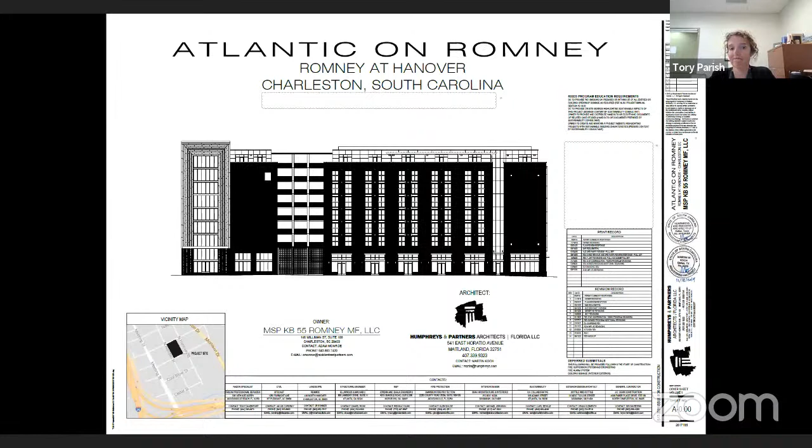All right, we have with this one, Mr. Craig Clements. I apologize, I forgot to—he is already active, I think. Yes. Okay, Mr. Clements, you have the floor when you're ready.

All right, thank you. I'll see if I can option video. Perhaps not. Okay, well, I will just say I appreciate the board members all coming out yesterday and taking a look at the sample panel. Sort of feel like my presentation was there, not having the sample panel here with us tonight. We had some good discussion around it on site, and I'm not sure I have anything to add to that.

Certainly can answer any further questions board members may have. Otherwise, would yield the balance of my time. Okay, thank you, Mr. Clements. Live public comment on this agenda item, Ms. Parrish? There is none. Okay, city staff comments and recommendations.

I do have a few observations tonight that aren't in the slides, but I'll be reading them. It is noted that this is a very large mock-up, and while representing 4 large, distinctively separate towers over a podium base, the mock-up likely could have been downsized. Both the architect and contractor have explained that the mock-up has been used extensively to work out constructability issues. This goes back to the inordinate size and cost of mock-ups, to which staff and board are increasingly sensitive.

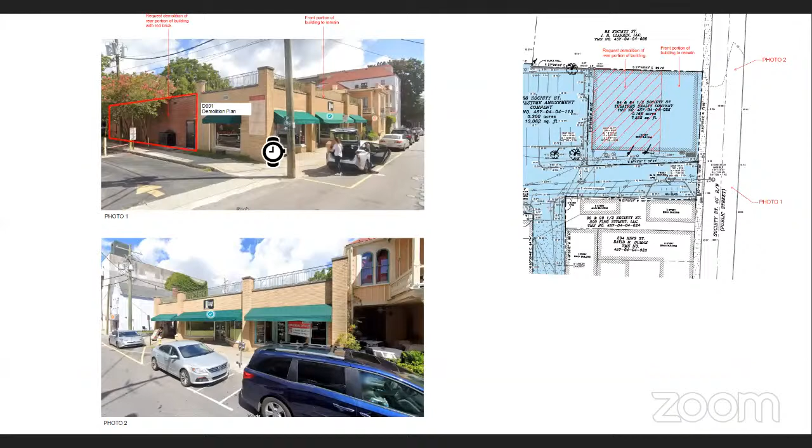This is pretty straightforward. This is, as we said, requesting demolition for 84 through 88 Society Street, the rear portion, as indicated on the slide that was just up. During the history of this building, there's not much since 1955. You can't really determine anything. We shared this information with Ms. Parrish late this afternoon, but I believe they already had a copy of this record from the previous applicant. So the yellow brick we're proposing to keep, the reddish brick we would propose to tear down. There was mention that this was a Constantine building, but we've never found any confirmation of that, so we don't know for sure if it was or was not.

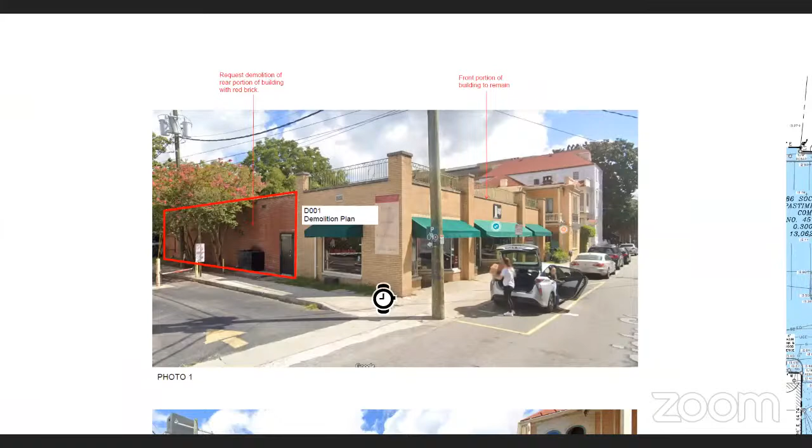Yeah, that's pretty much all we have for this. I'll take any questions. Thank you, Mr. Giuliani, that's pretty straightforward. Thank you for the research and for continuing to supplement the information that you got on the board.

Ms. Parrish, do we have any public comment on this agenda item? We do not. I didn't think so from what I've seen earlier. Very good. City staff comments or recommendations?

The rear portion of the building proposed for demolition is unremarkable with no real character-defining features. Second, the plane at which demolition is proposed is demarcated by a marked change in brick and is a logical point for removal to the rear. Third, there is a brick projection to an adjacent property wall to the east which will bear further study to ascertain what occurs behind it along the length of the wall. Regardless, it is assumed that whatever new construction is to follow can be handled for any adjusted existing conditions. And fourth, any materials which can be salvaged and reused should be. We are recommending approval of partial demolition as noted with board and staff comments.

Okay, Mr. Giuliani, if you want to have any rebuttal or clarification, now's the time to do so. You certainly don't have to exercise it. No, we're good, thank you.

Okay, very good, so we'll proceed to board discussion and a vote on this agenda item. Mr. Chairman, I just have one comment on item number 3 that Tori was talking about, that there is that one brick that is the same brick we see on the front and side of the building that reaches out to the east, as Tori describes. The Sanborn map nor the survey that I looked at shows that, so it's just, it is an important detail. It certainly can be handled. It's an interesting detail. Okay, thank you, Mr. Meadows. Further board comment?

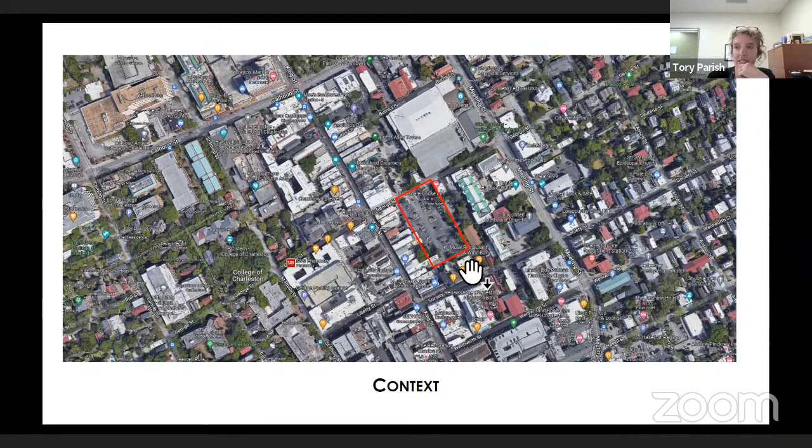All right, I am trying to get everyone upgraded here to speak. We have Mr. Mark Batoni, who is in the meeting, and I'm not finding Daniel's name. I can see Daniel. Hey, I'm so sorry, my audio cut out as soon as I was added as a panelist, so I just took out my headphones. Can you hear me now?

We can. Which of the two of you would like to lead off on this item? I'll go ahead and lead off. Thank you all very much. My name is Daniel Porbaba. I'm the project applicant and owner.

I'd like to thank you all so much for your time and effort reviewing the proposed project and sharing your feedback with us. I'd like to first start by saying that we feel really lucky to have the opportunity to work on this project. Charleston is one of the most special places in the world, and to be working on adding to the building fabric of Charleston in such an exceptional historic location that remains underutilized after all this time has been one of the highlights of my professional life. We feel a massive sense of responsibility and privilege to be involved, and have been so grateful for the support and genuinely thoughtful feedback and advice from so many stakeholders and community members. So I just wanted to thank all of you a lot before we kind of kick this off.

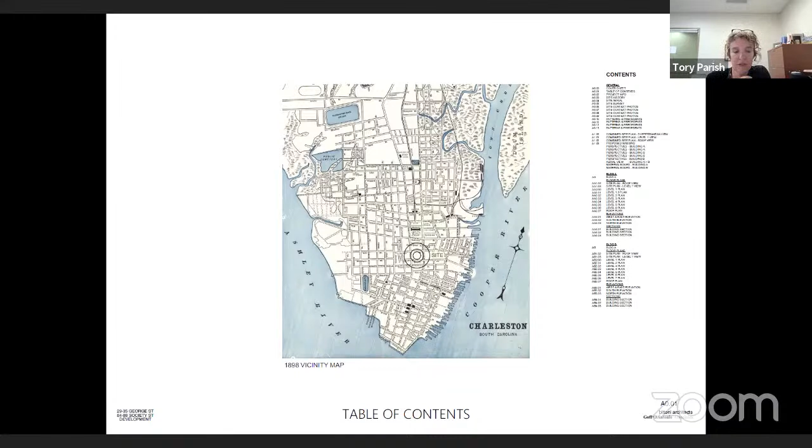So let's see, my understanding is that you're going to be, Tori, controlling the slides. I just simply say next as we go. Is that how it works? Sure, Lawrence Courtney is, but if you'll just say next, he'll advance. Okay, perfect, that's great.

Again, my name is Mark Balcony. I'm the principal architect here at Balcony Architects. We're based out of Los Angeles, California. It's a pleasure to be here in Charleston, and I look forward to meeting you guys in person at some future opportunity. It's been a real pleasure to look at Charleston and understand the unique situation we have with such a unique historical fabric.

So what we're doing today is presenting two buildings, as Daniel mentioned: 29 and 35 George Street, and 84 and 88 Society. Our George Street project is proposing a 6-story, 96-unit apartment building with approximately 3,500 square feet of retail and restaurant on the ground level, and 3,000 square feet of restaurant and covered outdoor dining on the second floor. The Society Street project is designed as a 7-story building with a 50-key hotel and 22 residential condominiums. Daniel also mentioned that we're going above our baseline of about 180 parking spots by adding 72 more.

One of the fun parts about working within Charleston is having historical context. I have a 400-year-old city versus Los Angeles, which is maybe about 150 years in terms of its contemporary nature. We took a closer look, took inventory of what was immediately adjacent. In particular, we have both our project that we talked about in the demolition permit earlier, and also focused on 90 Society, which we'll reference later when I show our site strategy. You can see some of the earlier versions of what was going on along the site.

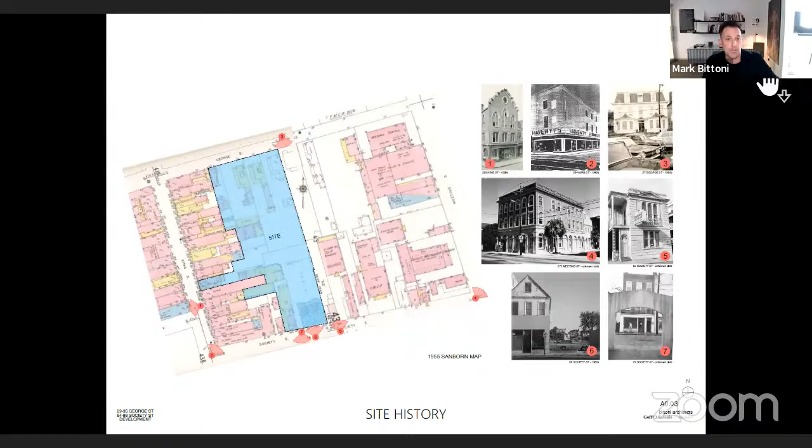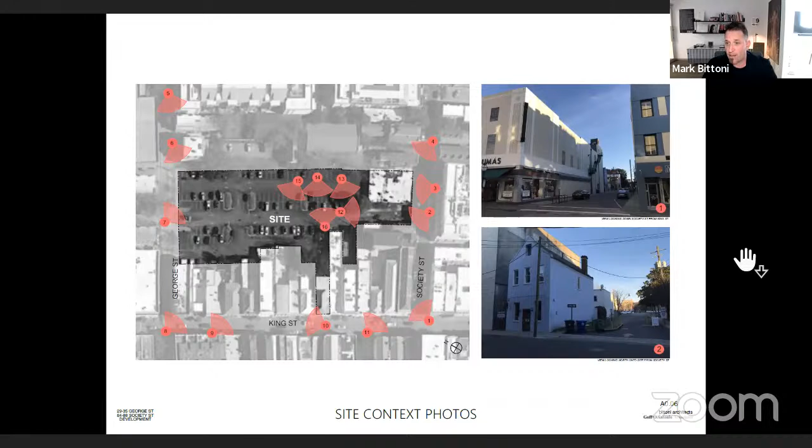This gives you an idea of the survey and how we attach that. These are some contextual images showing the site, how you approach from both east and west, and how it comes off of King Street. These have all been keyed in — you can see our existing historical building here, the theater company.

And these are contextual images along King Street, which you guys are all familiar with. Next, please.

So these are contextual shots showing the site going from the inside into the out, kind of like what we had looked at earlier with Tori in her presentation. Next slide.

This slide was meant to understand how we might be able to take a more traditional pattern language from the architectural vernacular of Charleston and somehow recontextualize it in a more contemporary manner. So some of those elements, you can imagine a loggia or windows that could be a certain scale, but those windows take on a different, more contemporary character.

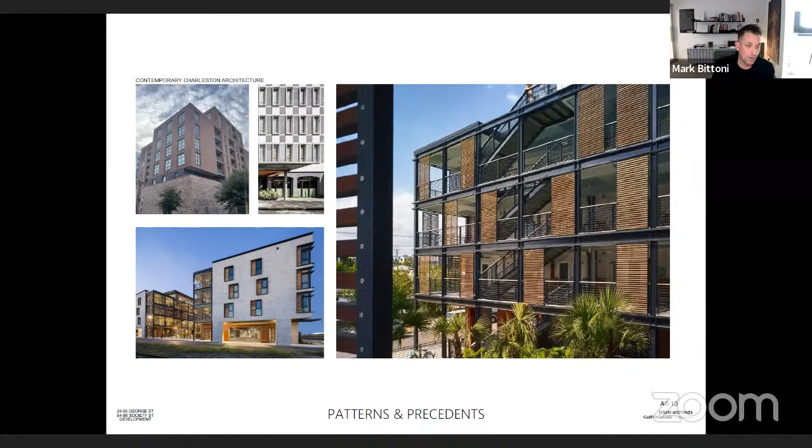Next slide, please. So let's go to the next slide, which is the combined site plan, and this is what Daniel was alluding to.

The idea is that our vehicular entrance would come off of, for Society and George, both projects, both buildings, off of George Street, and then you would circumvent, go along the back of the King Street vendors here, and have this access road. It would all be one way. That access would essentially be a drop-off for the hotel, pulling vehicular traffic off of Society and pushing a lot of it onto George Street.

That would then allow you to loop along the building, entering into the George side building. And then if we go back to the previous slide, Lawrence, please. Thanks. You can see we're proposing a full subterranean parking structure that would straddle both parcels, or both streets in this case. Let's go back to the site plan.

Great. Also, the other piece Daniel mentioned earlier is the park. The idea is that we would be using the existing historical building along Society, framing out the smaller building we'll show in some later renderings, 90s Society, which we thought was a really special building, framing that and creating this kind of urban plaza. The lower level aligns with the historical building already there, and we have this esplanade that connects you from the drop-off all the way to Society. The idea is to really create a space that's animated and lively.

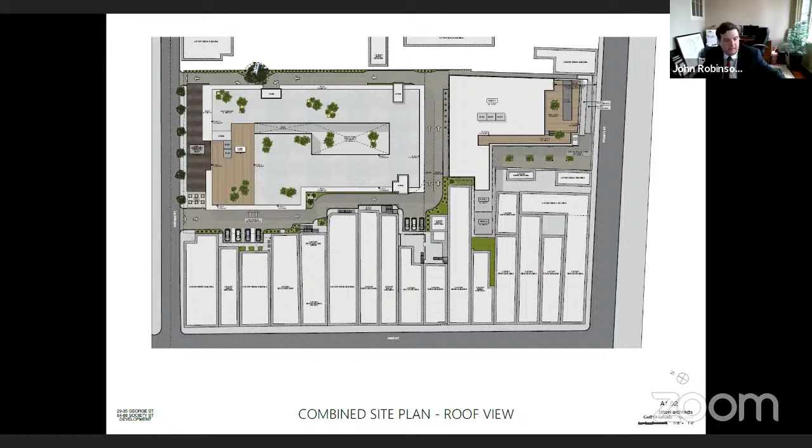This was sort of a visual impact study. One of the things we wanted to be cognizant of was our relationship to King Street and its perceptibility from King Street. So these are showing how our project's massing from King is negligible in terms of its view from King.

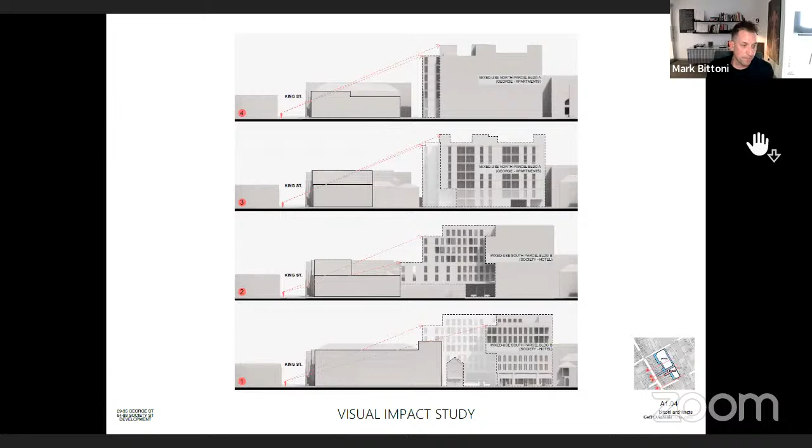Next slide, please. So this is building A. What we're looking at here is this loggia piece, a 2-story piece with our retail component at the bottom. Then we have the restaurant and terrace bar, which would be on the 2nd story. And then we have 4 levels of housing above that.

The mass of the project is basically broken up into 3 pieces: the 2 main masses, and then the middle connective piece, which is an exterior condition, a breezeway to allow airflow into the courtyard.

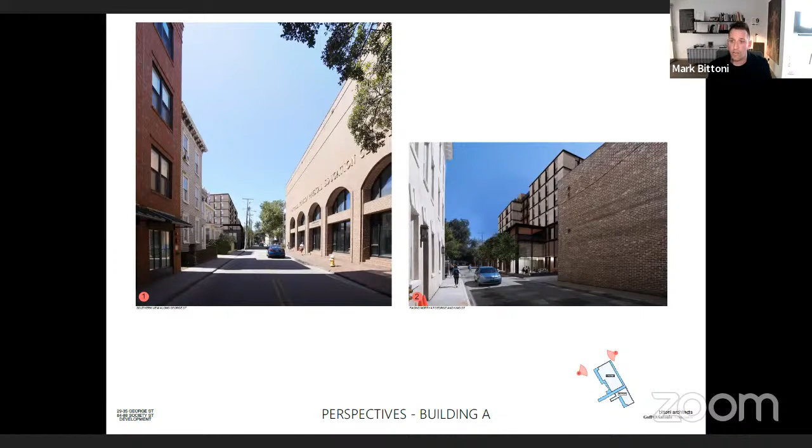This perspective gives you both views, east and west from the George side, showing how our project relates to the existing context.

Next slide, please. And then this is what we're looking at on Society. As you can see, we have our existing building on the 1st floor, and then our hotel identified on floors 2 and 3. Floors 4, 5, 6, and 7 are the piece that creates the cantilever.

One of the reasons why we adopted this cantilever as an architectural element was to allow as much openness to the courtyard as possible, so we wanted this to become its own encapsulated space.

I realize from this viewpoint, clearly this is from the other side, from the other hotel. I don't think you'd actually be able to see that.

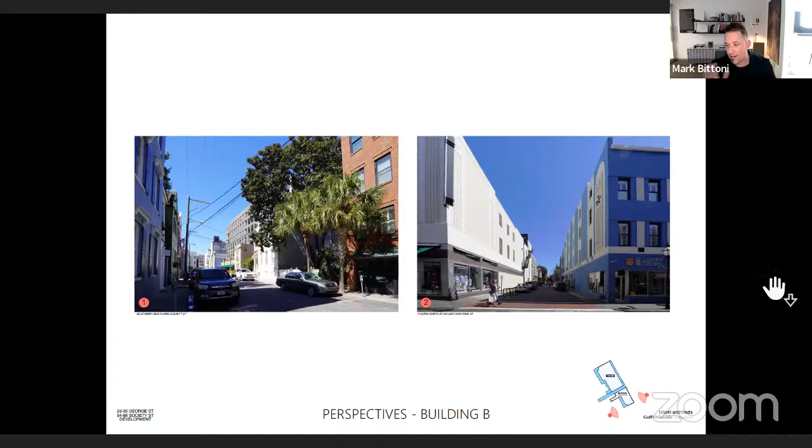If we look at the next slide, you can start to see how this fits in towards the context. And if we go one more, you can see from King Street the project actually starts to hide itself, particularly around the Dumas building, which I believe is right around 55 feet high. So it really masks that along the Society piece. Let's go to the next.

This is an aerial view, which I thought was interesting given the scale of the project and plunking this into the site and looking at the greater context. You start to see that some of the massing fits in with other elements, particularly on the other side of King Street, as well as some things on our side. I thought this was quite telling, where from an aerial perspective this starts to fit in. Next slide, please.

And so we have a material board for building A, the idea that we would be using high-end materials, looking at brick, metal panels, reinforced concrete in certain areas.

Next. And then that same palette, remixed in terms of color and tone, would be on Society Street as well. Part of the idea from a design standpoint was to create a more romantic ideal of the hotel component while still keeping a somewhat contemporary nature to the total design.

Next, please. Great. I don't know why this is blank. Okay, there we go. I think it's just a big file.

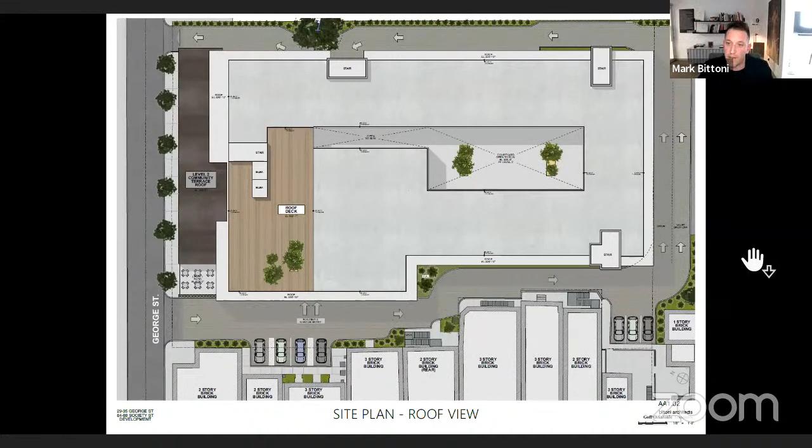And just on a more granular level, I think this is good to see how our entrance comes in off of George, and how we're maintaining all of the uses for the King Street merchants from the backside. That's going to be a nicely articulated landscaped area that people can benefit from on both sides of that easement going across.

Next, please. And then these images, which I'm sure you've already had time to review, are more of the nuts and bolts aspect showing how the building works and performs. We can keep going.

And then these are more of the straightforward architectural plans, we can kind of zip through these. Keep going there. This shows you how that building along George develops - it's a kind of standard courtyard. One of the things too is that we've eliminated what was a 7th floor on this, so now it's a 6-story building.

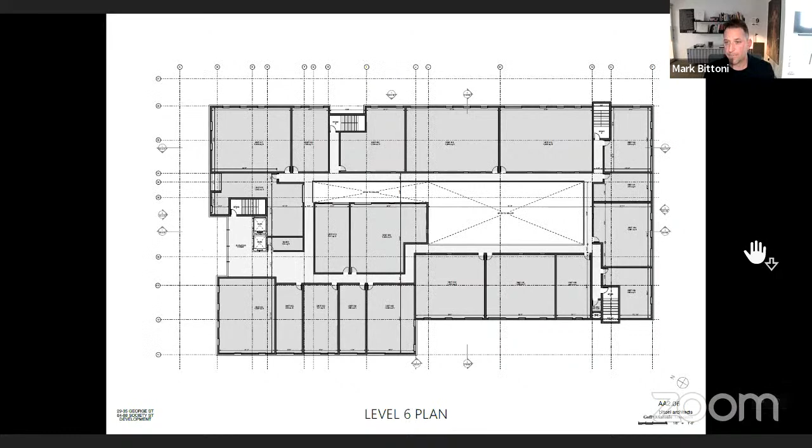Again, and roof plan. I think now we're going to go over to the Society side. Or actually, I think these are going to be the exterior elevations, if they pop up. Let's see, we can keep going through there. And I guess let's get to the Society side and kind of explain the ground level. I think it's a couple more here.

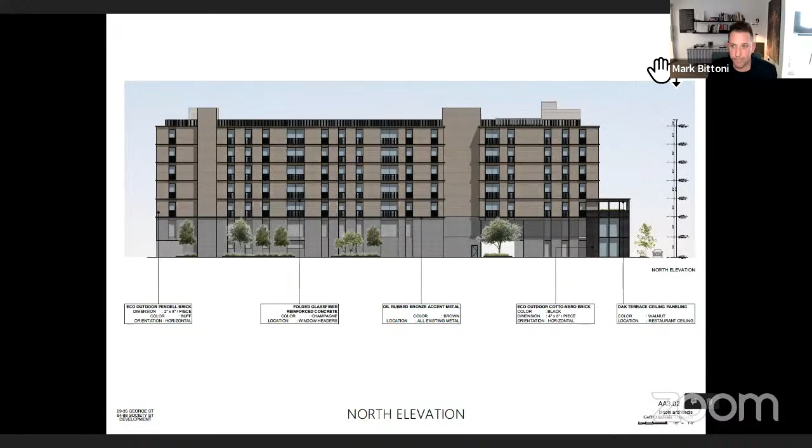These are the heavy ones. We can keep going. Here we go, all right. So can we go back one? Sorry Lawrence, there's an image there, or at least there should be. Maybe it's not, okay, we can go to the next one. Yeah, that's fine.

The rest of the images we have are more straightforward architectural things, and I think that would be the conclusion of what we have to show. Okay, thank you Mr. Bittoni. Thank you for your time.

However, we feel the contemporary design presents a stark contrast to the highly traditional historic context. The architectural expression, including proportions and details, should be softened to better relate to the scale and character of nearby buildings on King and George Streets. Particular attention should be paid to the ground floor, where pedestrians will most experience the building, which currently has a highly modern treatment. Also, we would encourage studying a better location for the elevator to mitigate visibility of the overrun pop-up at the roof.

On Society Street, our foremost concern is massing. According to the BAR principles, the authenticity of construction should be supported, and the architectural language of the building should be legible. We feel the proposal directly counters this principle of building tectonics, as the massing gets heavier as the building goes up. The approach of introducing separate, increasingly wider building masses compresses the historic building, presents a disjointed architectural expression, and creates an uncomfortable space underneath the heavy cantilever.

This leads us to discuss issues with height. Located in the heart of the historic district, directly adjacent to the 2- and 3-story buildings of Lower King Street, this is one of the most sensitive sites to seek redevelopment in recent history. We must be diligent since this will have significant lasting impacts on the character of this area. Due to the high degree of architectural issues with the project, as well as its location within a highly sensitive, small-scale historic context, we cannot support additional height and feel a denial as submitted is the best course of action to allow for significant restudy. Thank you. Thank you, Ms. Minnick.

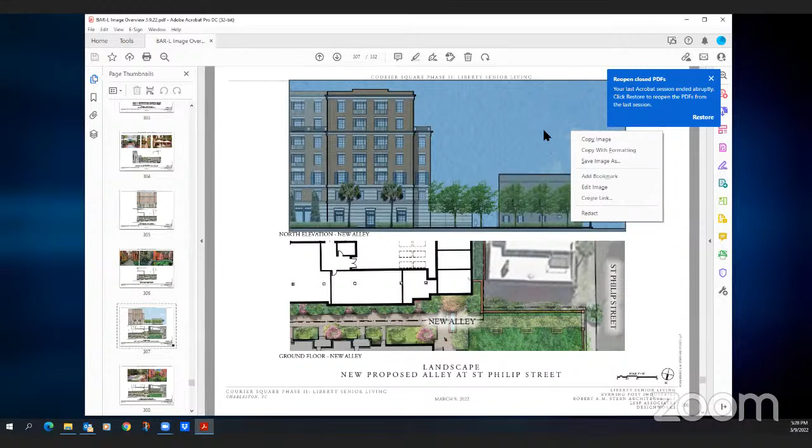Yes, thank you, Mr. Speaker. This is Justin Schwebler with Historic Charleston Foundation. I would first like to thank the applicants for meeting with us many times over the past few months throughout the development of this project. They've taken our comments and concerns into consideration throughout the process. I would also like to mention that Historic Charleston Foundation owns and maintains an easement on 306 King Street. The design team has worked very hard to satisfy the requirements and limitations of that easement.

We do, however, have some strong concerns with the project, and we've discussed these with the applicants prior to tonight's meeting. Building A on George Street, we find that the upper stories are too horizontally accentuated. The horizontal belt courses are too pronounced and make the building appear much heavier. Removal of these bands and inclusion of some delicate vertical detailing could help to lighten the building and add a more beneficial sense of verticality that follows the recommendations of the design guidelines. While we appreciate the minimalist contemporary design direction, greater attention should be paid to these levels to add more visual interest to the facade.

Building B on Society Street is also an area of concern. Again, the contemporary architectural direction, high quality material choices, and dramatic architectural moves with the cantilever are appreciated. They also have given up substantial buildable area to incorporate a park space for the public, but we feel the building is currently far too oppressive over the historic storefront. While the design team did express their concerns with us about rearranging the massing, we feel that there needs to be a more significant relief between the new construction and the historic building. We recommend pushing the mass of the new construction away from the street by at least one bay to be flush with the rear of the historic storefront. This would also help to reduce the visible impact of the 6-story massing along Society Street.

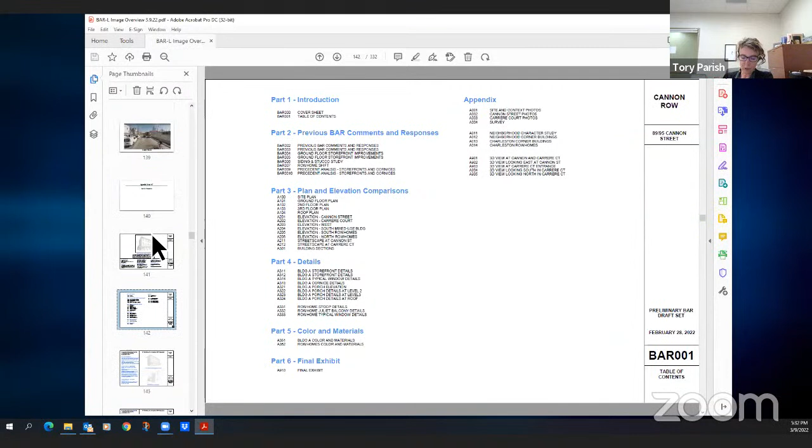Number six, the application expresses there is a request for an additional floor via finding of architectural merit and context on the Society Street building only. The George Street building appears as 7 stories, however, and there is nothing in the ordinance related to story count as only being from the front elevation.

The above ground and visible portions of building A consist of 2 stories of above-grade parking with 5 floors above it and a shallow liner building across most of the front at George Street. Staff finds that the lobby mass does not sufficiently disguise what is 2 stories of parking. However, the lobby mass in combination with elevation revisions to the parking portions could potentially disguise what is 2 floors.

Seven, applicant's proposal requires a variance at the portion against George Street for a ground floor over 20 feet tall. BAR may grant up to 25 feet for the ground floor based on architectural merit and context.

Number eight, regarding massing and scale, the cantilevering at Building B is a reverse in tectonics and is fundamentally unsympathetic and insensitive to its surroundings and to the proposed remnant element.

Number nine, the general architectural expression for the George Street building, Building A, is foreign to the block, and while it consists of an interesting interplay of horizontal and vertical elements, its architectural language would be at odds with its surroundings. The general architectural direction for the Society Street building, Building B, of multiple expressions is likewise incompatible with its context. Number ten, the lack of a perceptible human scale at the George Street first floor is disconcerting.

And number eleven, perfect timing. Context is to be considered as part of a finding for an additional floor based on architectural merit.

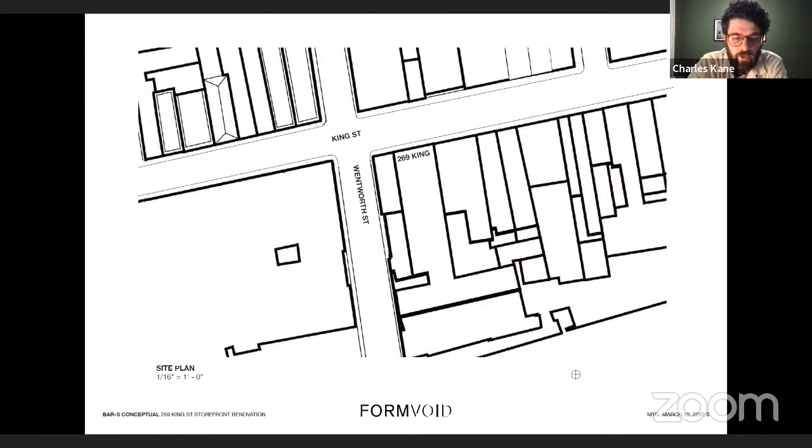Just line drawing of the context. All the buildings higgledy-piggledy. Next.

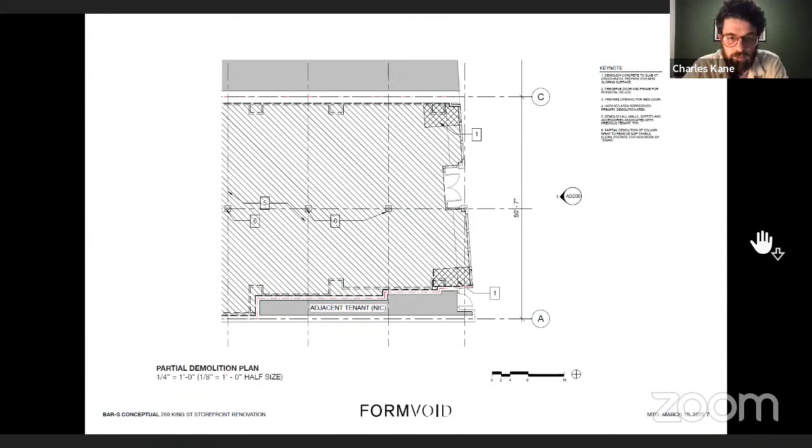So just context, you can see that new dark black zigzag line is the division of the two tenant spaces. And

then if we go to the next slide, we can see which is the items in consideration here. So in order to get these new doors in and keep them recessed off the streets, we have them partially recessed, kind of like the existing entrance to the former gap space, and then this very slight incline for them. Okay, next.

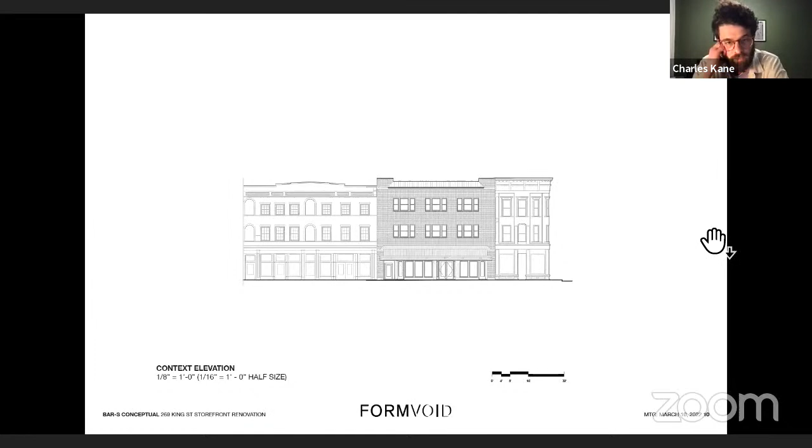And here's the building kind of in context, not too different from what it is now. Keep going. You can see basically we're taking out two of the existing window panels and trying to, in the most minimal way possible, though the storefront's not historic, integrate these new doors into that system. And next.

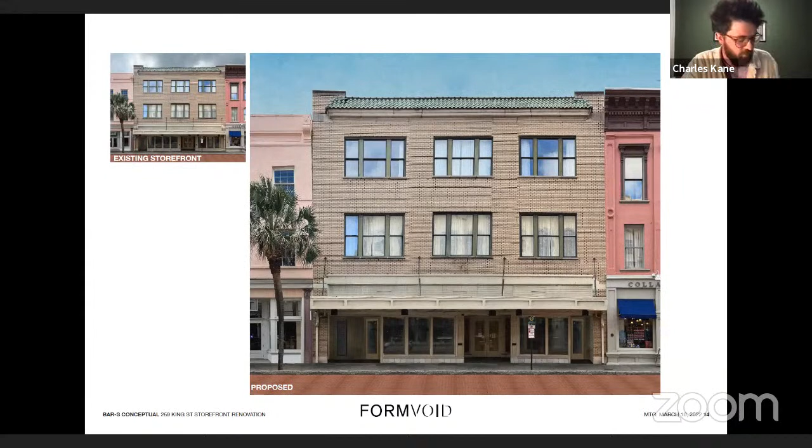Thank you. City staff comments and recommendations. We've got one observation. The proposed work involves the modification of two doors in an existing storefront, which is to remain, in order to accommodate two tenants on the ground floor. Staff comments: one, drawings indicate the new doors, if not reusing the existing doors, will match the existing in material and profiles. Two, the material to infill the areas of demolished floor areas is not specified. Applicant is to work with staff on the appropriate material for any exterior material change. We are recommending final approval with board and staff comments, with final review of permit drawings by staff.

Thank you, Tori. Mr. Kane, anything further from you? That sounds good for me. I had talked to the client, at least on the exterior, about extending that blue stone into the new proposed recessed areas, but I'm happy to work with staff on that.

Thank you. Board comments, I'll start. Lawrence, can you go back to the picture of the Efird's department store from the 1930s? Okay, I just wanted a chance to look at that slide again.

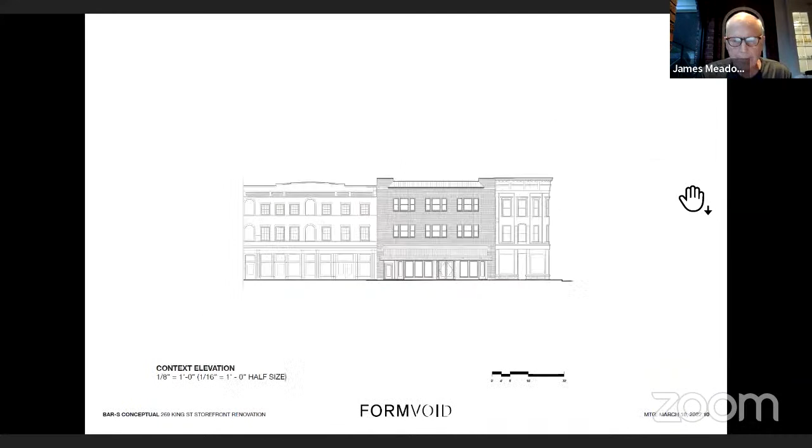Okay, thanks. Further board comments? Mr. Chairman, I am in opposition to the modification of the storefronts in order to create two tenant spaces. That's the reason I went back to the Efird's picture. It's unclear from the picture what it looked like exactly in 1930, but if we're deferring to assuming that the current iteration of the facade - being familiar with Efird's department stores, a very popular model in that particular color brick and style in the 1920s and 30s, you can see it all over the Southeast. Efird's was a Charlotte-based department store chain, but there in Columbia, what became the Lourie's building, had this very common facade, much like a Woolworth's, where these older buildings are retrofitted. I'm aware it's a challenging issue with interface to zoning and coding, but I would be opposed to the modification without clearer evidence of what the facade looked like with Efird's renovation in the late 1920s, early 1930s.

Well, I'll jump in here. If I understand correctly, the storefront we're talking about is not historic. Do we have any evidence of that, or to the contrary? Maybe Tori can clarify that - staff, about that. I've looked a little bit into this, and that's why I rely on Mr. Kane, well, that's where I got the information about the storefront, that what you see there was modified in 1999 for the Gap. So I can't confirm that. Okay, it wouldn't be surprising.

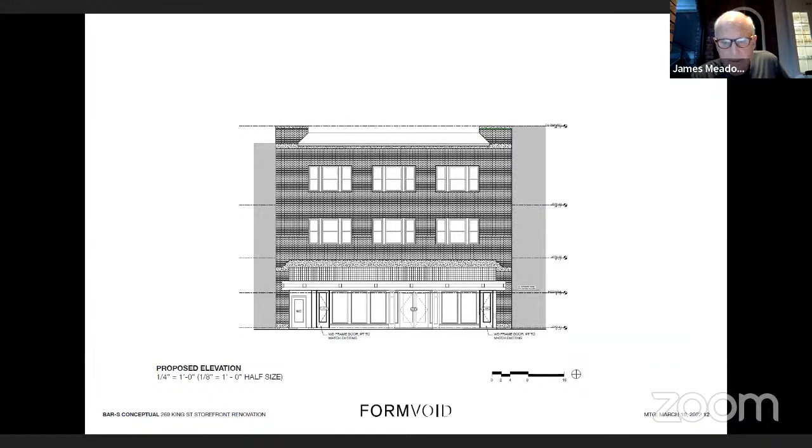Mr. Chairman, let me say that I think this should be on the burden of the applicant, and not during this meeting getting Tori to do research to present. But, it's just a comment. No, I understand.

Are you having difficulty pulling it up? Yeah, I've got it open on my screen, I just can't share it with you all. I'm making you host right now. Okay. You may have to stop sharing though. Okay, let me try. Hold on, why does it keep closing itself? I'm trying this one more time. I'm sorry, this is so weird, it doesn't show up on my... I got one more idea, hang on. I don't know, I'm sorry, I can't get the photograph to share, but I can share anything else with you right now. That's okay, let's make sure we don't get any more sideways in terms of hosts, et cetera. So you might push it back so we don't have an issue on the next agenda item.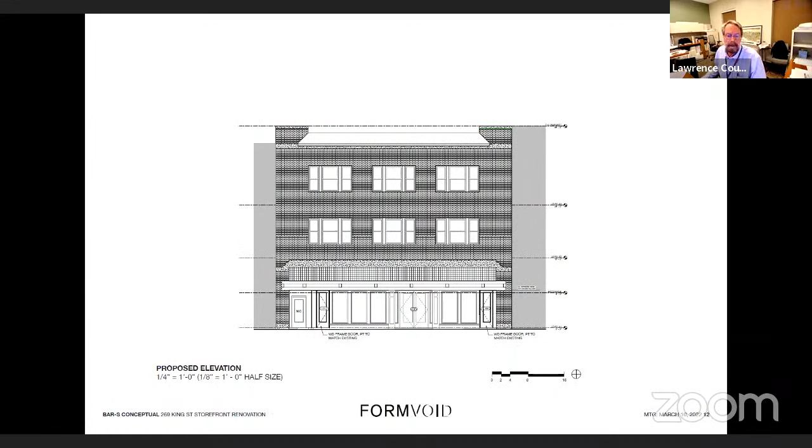89 to 95 Cannon Street is requesting preliminary approval for the construction of a new mixed-use building on Cannon Street, with a variance request for the first floor height, and the construction of 4 row homes on Carrere Court. This one's in Cannonborough, Elliottborough, Height District 2.5 to 3, Old City District.

Some context to familiarize you: that's Cannon Street above the project, north of the project, running left to right. This is the project, we're in the street looking south. The building at the back was approved for demolition a few months ago. And looking west on Cannon, looking east.

And we've got Mr. Stephen Ramos, who I forgot to elevate. Okay, I can't do it now. Now that I'm not host anymore, I can't make people... see if Laura... wants a moment to do it. Okay. There are a lot of people still on this call. Maybe I should have been co-host. I believe you are. Okay, I'm just me now, this drama should be...

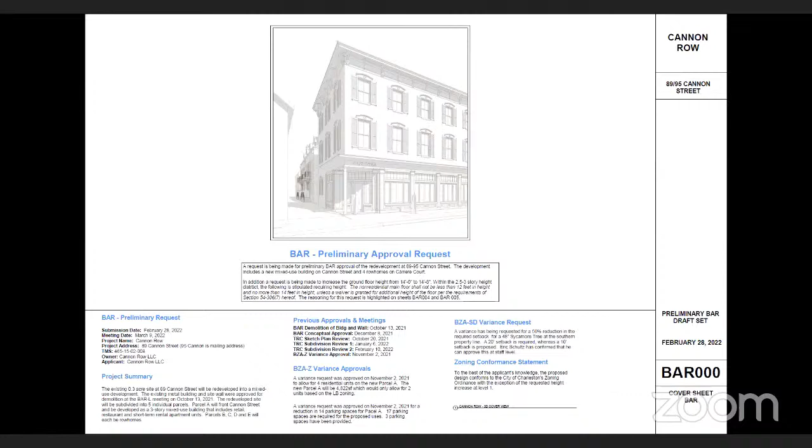Next. Okay, so the first several slides deal with the comments from the previous BAR. We've got the comments listed on the left, and we've written a response to each one. In the interest of time and preserving people's interest in the project, I'm not going to read all those comments. I'll simply address the particulars when we see the images. Next. Next.

This was the first key revision. Mr. Bello made a comment at Conceptual BAR that the building seemed a little squat and that the ground floor might be better if it was taller. So the image on top is a revised north elevation. We made several subtle changes, such as increasing the height of the windows, increasing the height of the transoms, as well as inching the ground floor up 8 inches. It was 14 feet, now it's 14.8. And to keep the overall building height the same, we removed 4 inches from levels 2 and 3. Those series of changes, as well as increasing the height of the pilasters, I feel did improve the proportions. So that was a great comment.

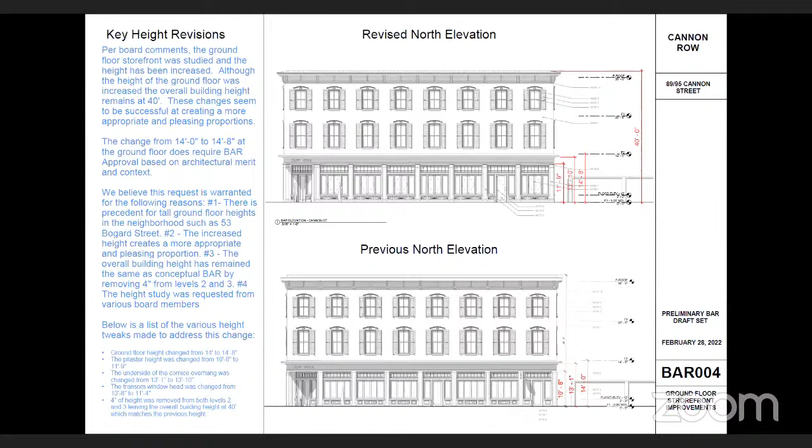Another comment suggested by board member Eddie Bello was to study siding on the project. This project is skinned completely with stucco on CMU block, and it was suggested that siding might be looked at because the Elliottborough, Cannonborough neighborhood is predominantly siding because it's predominantly residential. I think the building could be siding. I think it could also be brick, but I would still prefer to keep it as a stucco building. I think it has a substantial look to it. I think it will distinguish itself from the historic architecture. And for maintenance and durability, it is also our preferred strategy. So for all those reasons, we are still proposing a stucco building.

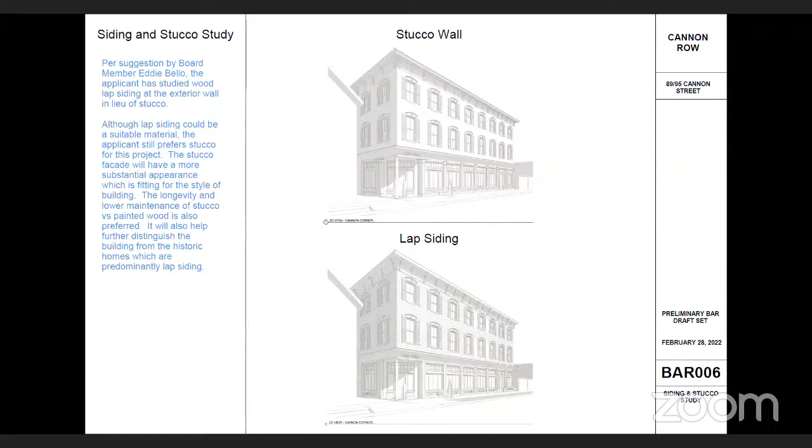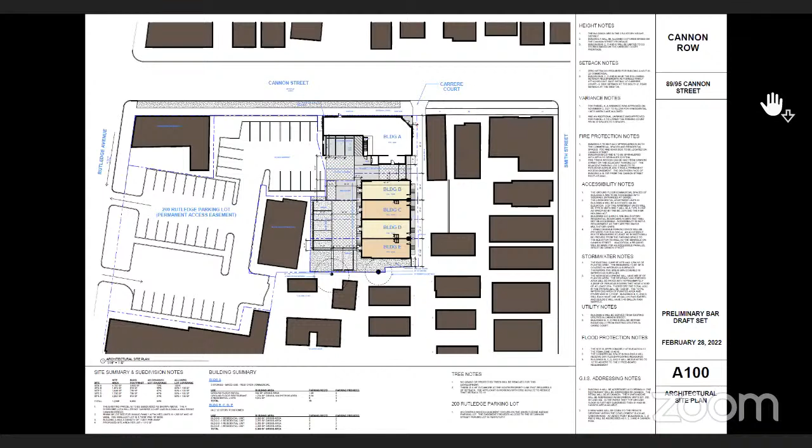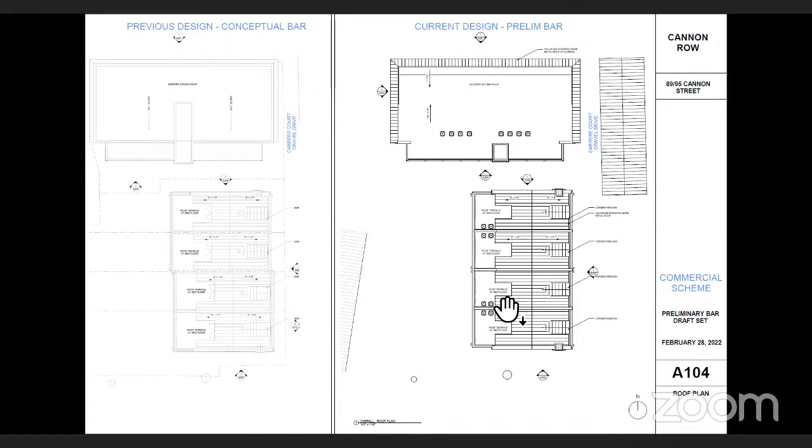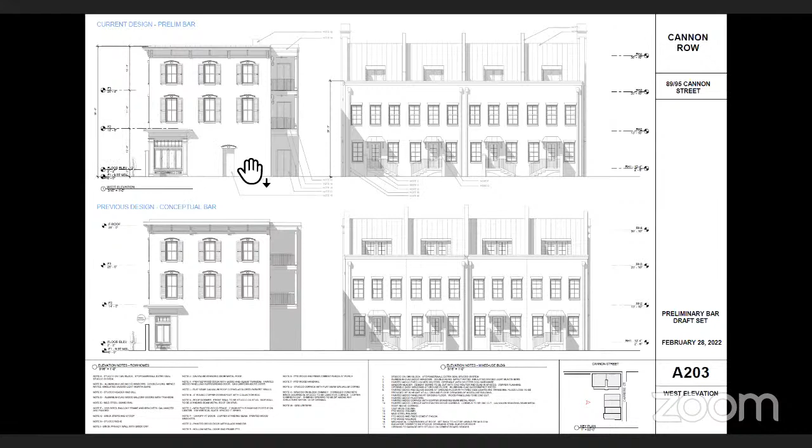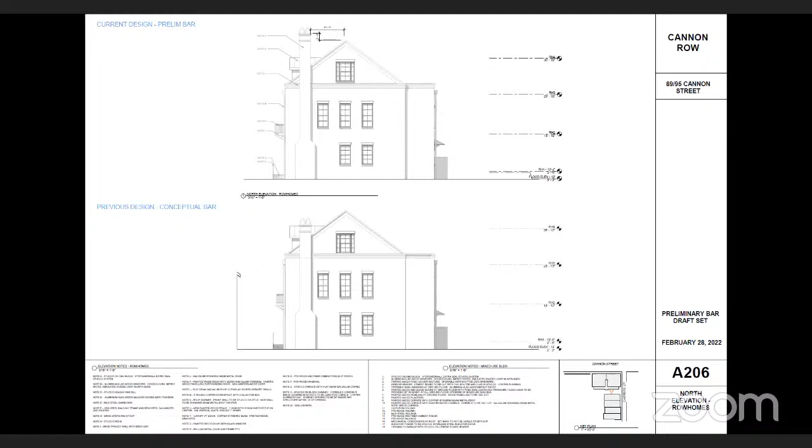After really digging into the building code and looking at that chimney, we realized that it wasn't tall enough. It needs to be 24 inches higher than any building element that's within 10 feet. And so because of that, it had to extend up beyond the peak of the roof.

This is the streetscape elevations. These are the overall building sections.

And these are the details for the project. I mentioned that the storefronts are very important. We've studied storefronts that are in the area, as mentioned, and tried to introduce some things that are a little unique. Our plan is that the paneling that sits below the storefront will be a CNC cut milled panel to get almost a relief pattern. So that's one unique thing we're doing.

I mentioned that we will have the operable windows, and in fact, they're really just doors is what they are, but they're at a window height. Most of the materials down at this level are painted wood. The windows are aluminum clad wood, so that they really hold up over time.

This is the pilaster details. Again, the building is CMU block. We changed to 6-inch block below the windows to get some extra depth.

This is what a typical window looks like. In an effort to get the windows nicely recessed, we are using wood blocking. So if you look at the jamb detail at the bottom, you'll see we've pushed 2x4 blocking back as far as we can so that we can return the stucco approximately 3 inches into the jamb opening. Again, these are aluminum clad wood windows.

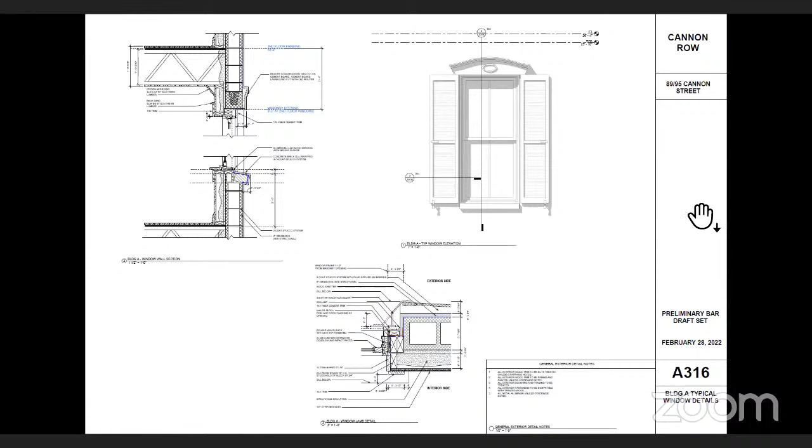This is the detail up at the top cornice. It's about a 2-foot overhang. Once we get up to this height, actually at the window jambs and at the cornices that are up high, we are using fiber cement trim wherever possible for maintenance and durability reasons. And since it's all going to be painted, I don't think anybody will ever know the difference.

The corbelling, as of now, is actually planned to have structural capabilities. We are going to be stacking 2-bys and cutting those shapes out of them, and then doweling them together to create the more chunky pieces of wood. I've specifically picked a more contemporary and clean looking corbel shape, again, as another way to somewhat distinguish this building from some of the more historic buildings in the neighborhood.

And here are the porches.

So the fascia boards on these porches, again, will be fiber cement. It should be noted that these are on the back of the building. The railings are all wood, the columns are wood, and then they'll have trim elements. If it's a flat panel, we're using fiber cement. If it's something that has a profile, we're using wood.

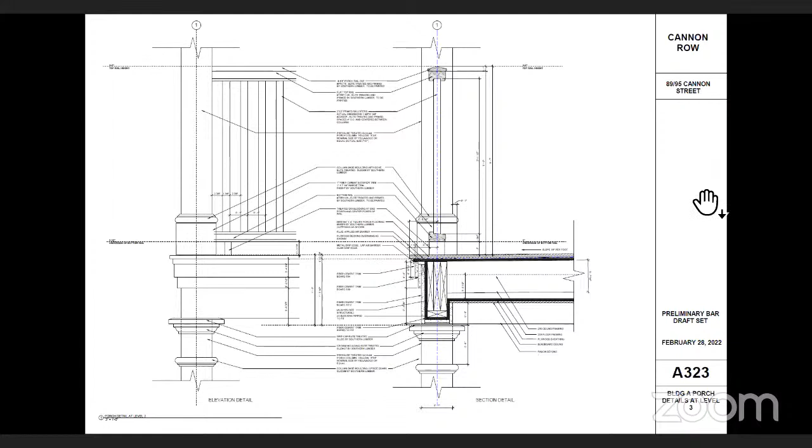And then this is the top of the porch.

These are details through the stoops that are on Carrere Court. They're going to be cast concrete poured in place. The walking surfaces will be brick. One thing that I realized we missed on this, the concrete surfaces will all be covered in stucco, even though these details don't show that. We just forgot to put that on there.

The railings will be mild steel, which is effectively a contemporary version of wrought iron.

This is the Juliet Balcony, which will be made out of tube steel. We tried to get those tube shapes as small as possible. The intent is that this whole unit will be built in a shop, galvanized and painted, and then installed all in one piece.

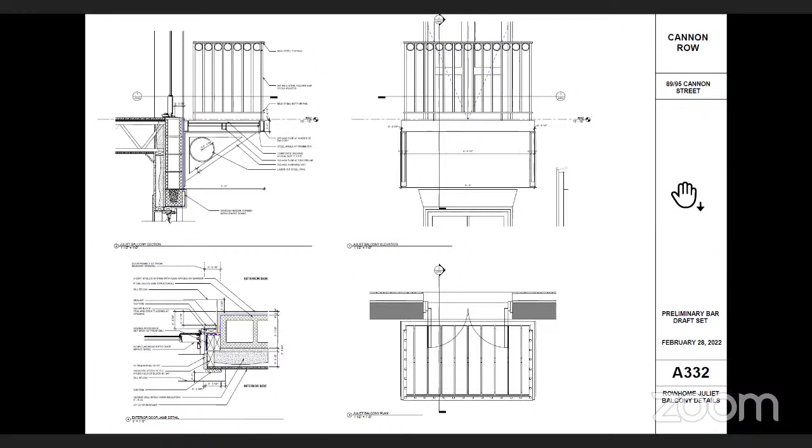And just a few more window details. The only difference at the row homes is that they don't have shutters.

This is just some material call outs as well as a color study. I'm never very good at color, so this is just the first pass, but it has the general intent of what we're looking for.

And then this is the row homes, which are a little more muted and a little more contemporary, I would say, with the black and white and the gridded windows.

So this is the last slide I'll show. We are requesting preliminary BAR approval.

Because we have increased the height of the ground floor in the 2.5 to 3-story height district, ground floors are limited to 14 feet. However, the board does have the ability to permit higher ground floors, and I believe it is warranted with this project. There is precedent for tall ground floors in the neighborhood. The height increase, I believe, creates a better proportion overall, and we maintained the overall building height by taking height out of the other floors.

And this was a request that was made by the board members to study the ground floor, so I hope you'll consider that, because I think it is helpful to the project. And I think we've answered all of the previous comments. So with that, I ask for preliminary approval and am happy to answer any questions you may have.

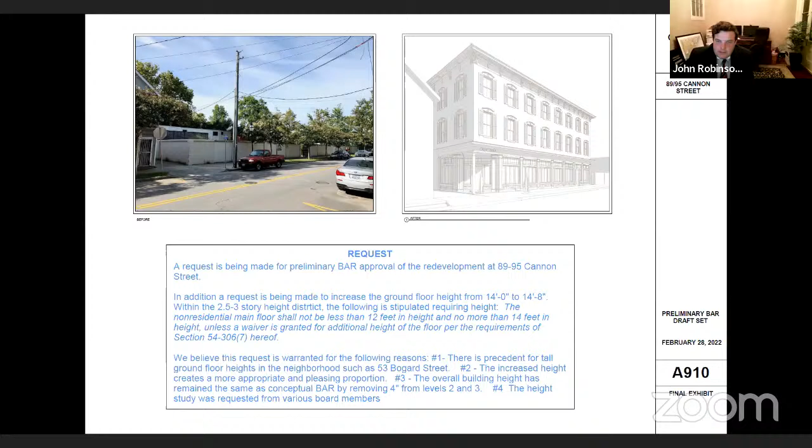Thank you, Mr. Schwebler. Is that it for public comment, Tori? That concludes public comment. Very good. City and staff comments and recommendations.

One observation, the project has changed in primarily subtle ways and continues to improve. Staff comments number one: the only thing staff finds any issue with involves the clearly articulated base of the building along Cannon Street, where it abruptly stops at the east and west side elevations. This may occur to accommodate what is occurring at the rear of the building, but this may be better handled.

Number two, the alignment of and further articulation of the row houses are improvements. And three, there are enough details to give a good sense of the project's composition and materiality. We are recommending final approval with board and staff comments, with final review by staff of permit drawings.

Okay, any further response from Mr. Ramos?

Sure, I'll be brief. Thanks to Preservation Society, Historic Charleston, and city staff for the kind words. I did want to address the articulated base of the building because that's a great comment.

If you could back up about 5 or 6 slides from where you're at, I just wanted to show a couple images. Keep going. One more. Yeah, that's perfect.

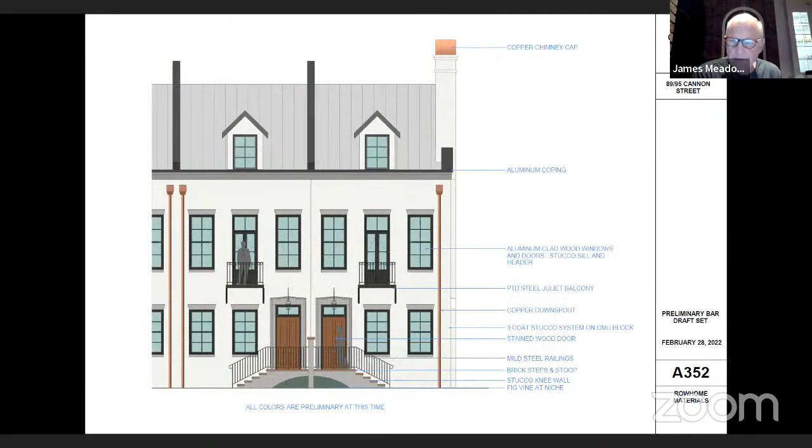Mr. Chairman, I like the stucco on the block. I like the height increase on the first floor. I like the project overall, and I plan to support its final approval tonight with my vote.

I would just join your comments, Mr. Meadors, and say that raising the first floor storefront and making the second and third floors slightly reduced in proportion has worked very well in this project. It's a good exemplar for others dealing with this particular challenge.

And the wrapping, or the lack thereof, of the facade where it stops around the corners does not particularly concern me, especially in light of the precedents that Mr. Ramos was able to show us. Further board and staff comments? Board comments? I agree.

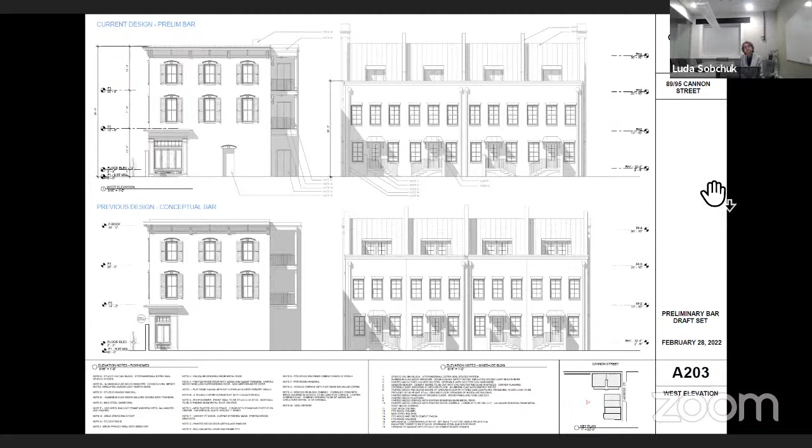Further board comment. This is Carol Wheeler. I agree with my fellow board members as well, and would make a motion for final approval with board comments. Final approval with staff comments 2 and 3, and board comments, with final review by staff and approval of increased first floor height as presented.

Okay, your motion, Ms. Wheeler, as I understand it, was for final approval incorporating board and staff comments 2 and 3, with final review by staff for permit drawings. Is that correct? Yes, and the approval of the increased first floor height as presented, which we should include just for zoning purposes. Thank you.

Is there a second to that motion? I'll second that. Okay, Ms. Wheeler's motion, Mr. White has seconded. I'll run down the roll.

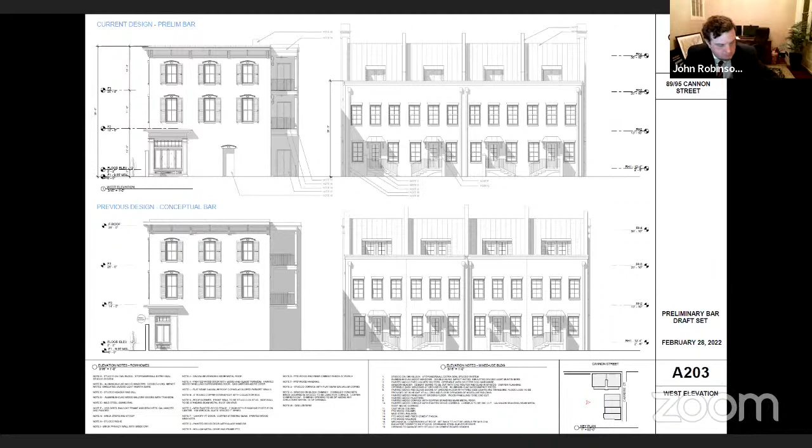Ms. Sobchuk, how do you vote on this motion? Yay in favor. Mr. Meadors? Yay in favor. Ms. Wheeler? Yay in favor. Mr. White? Yay in favor. And myself, yay in favor.

Congratulations to the applicant. We'll look forward to working with you to getting this building down the stretch. Thank you.

Agenda item number 8 has been deferred. Tory, when you have a moment, you can move to agenda item number 9. We're moving to 609 King Street.

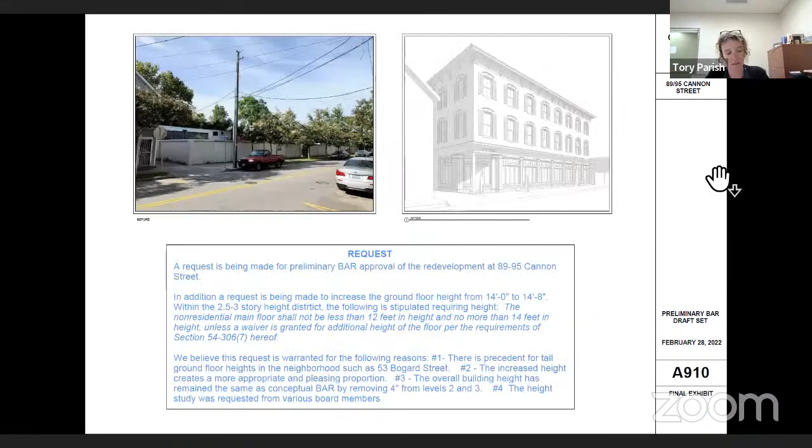While Lawrence gets the slides ready, this one is requesting conceptual approval for a new senior living facility. It's also in Cannonborough, Elliottborough, Height Districts 4 and 6, and in the Old and Historic District.

So we'll wait for Lawrence to get the slides caught up, and we have Mr. Gow joining us this evening. There we go. Very good, we've got context if you need to be familiar with this. I apologize, I didn't mean to cut you off, Tory.

And with this one, you know what? I need to let everyone in, and I can't. Lawrence, you'll have to let everybody in.

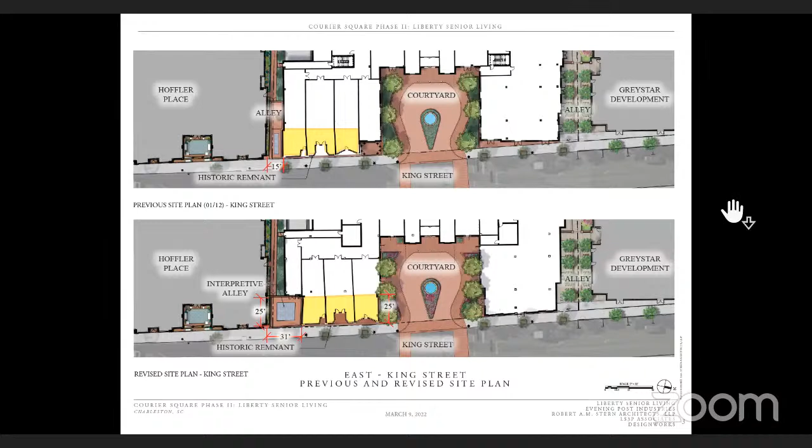Next, please. So the before elevation is at the top and the after elevation is at the bottom. You can see the remnant of 609 and how its dimension actually defines the dimension of the northern wing as well.

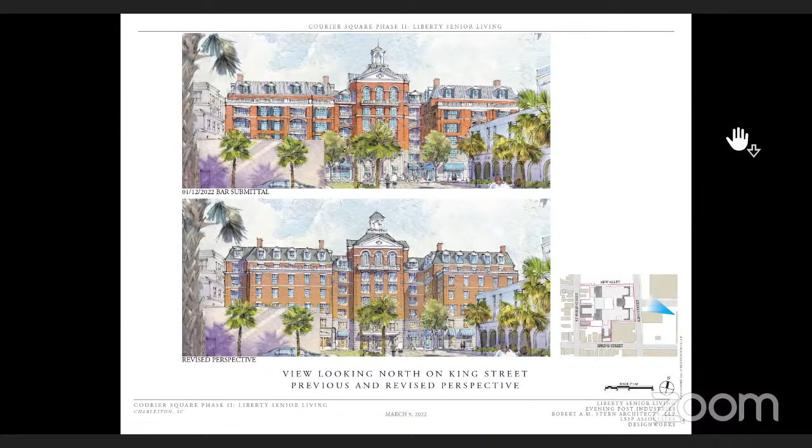At this point I'll turn it to Gary—this is Gary Brewer from Robert Stern Architects. Before rendering on top, proposed rendering on the bottom. You can see how the plan change, with the historic remnant moving north, allows us to have symmetrical wings that are bilaterally symmetrical to the center line of the courtyard. You can also see the simplification of the facade with the repetition of simple windows, achieved by moving the balconies to the north and south.

Next, please. And here is the proposed design. We have also slightly reduced the height of the center tower based on staff and board comments. You can see again the simple repetition and the simplification of the facade.

Next, please. Here you can see how, with the historic remnant moving north, its width defines the wing of the building above it, which is set back. From that width of the historic remnant, we duplicate that on the north side, so that remnant is informing the entire project with its width. Next, please.

So with regard to the historic remnant, the new position allows for a larger interpretive alley to the south and greater exposure of the southern wall. Buildings on King Street are proud to the street, aligning with it without setbacks, forming a continuous street wall. The northern wing respects this alignment with no setbacks. For the southern wing, the larger mass of the new building is set back 13 feet. This deviation from what is typical to King Street is in response to the historic remnant. We studied many options; a larger setback lost the presence of the street wall, and a lesser setback diminished the reading of the remnant.

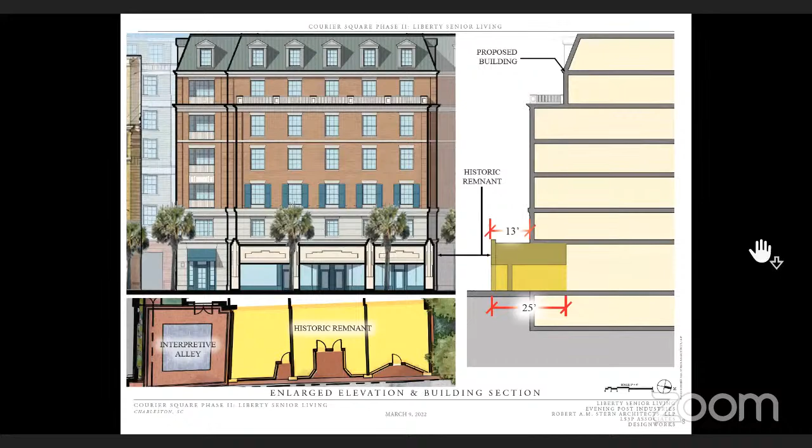The new position enables the sidewalls on the north and south to be exposed for a full 25 feet, and the sidewalls terminate into a perpendicular wall of the new building. As 609 was deemed worthy for its cultural significance as neighborhood retail, and in discussions with staff and the historic groups regarding adaptive reuse, we're proposing 2 punched openings in the northern wall. This will enhance the neighborhood retail operations proposed to go there.

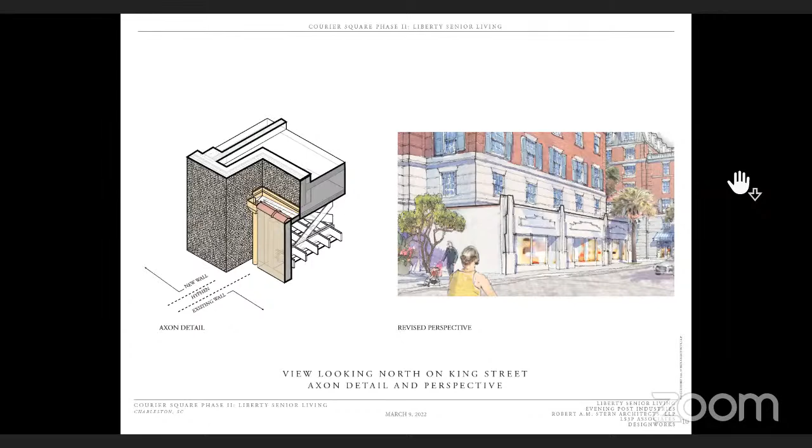We looked carefully, as requested, at how the remnant will attach to the new building. The side walls terminate into a perpendicular wall where there's a hyphen, and the hyphen will express the roof drainage that occurs from the remnant.

We've moved the porches from the King Street facade to the sides of the building, where they now face the entry court.

In conclusion, you can see the significant changes that were made: simplification of the facade, moving the remnant to make it more important with a wider interpretive alley that makes the southern wall of the remnant more visible, and the overall simplification of the facade and the lowering of the tower.

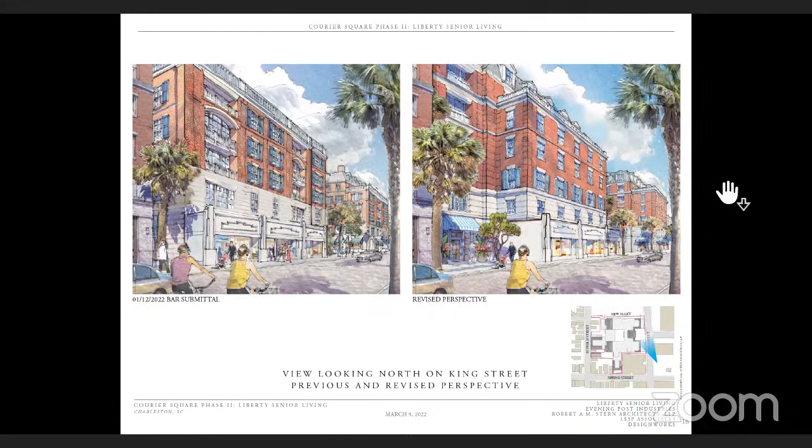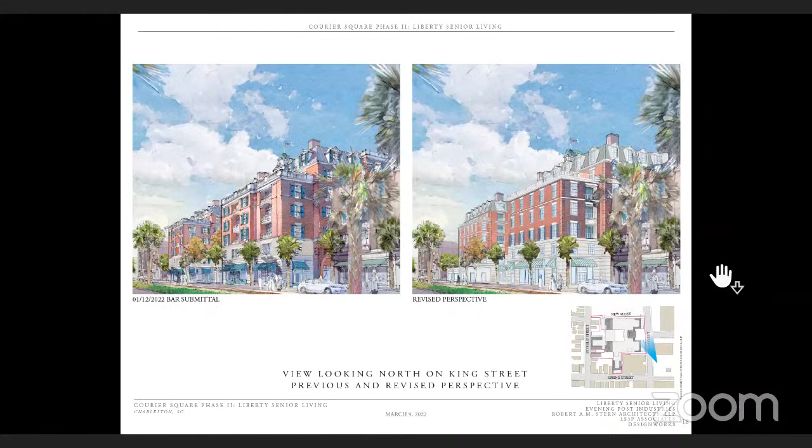So before and after from the north.

The northern wing really takes cues from the historic remnant. There's now 3 bays of retail, and you can see the window on the side as it heads down the alley.

We feel the new design is sympathetic to the remnant, and that the remnant actually informs much of the design of the new building. We feel the new building design expresses a rhythmic, straightforward, and repetitive design in keeping with many of the qualities of the orphan house that the board emphasized.

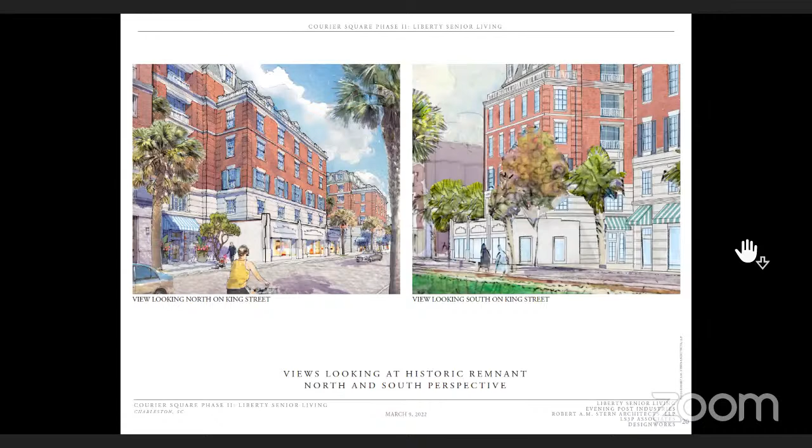Now we're going to move to Spring Street. Basically, you asked us to start over, to come up with a new direction, and in that new direction, to be sure that we respect the scale of the historic buildings to the west, including their floor height. You also asked us to address the vehicular entry.

The new approach establishes a wing of the main building that is set back from the Spring Street right-of-way by 45 feet. The wing is designed with the same brick and basic fenestration as the main building. Forward of the 45-foot setback is a new attached structure in keeping with the scale and proportions of the historic structures to the west. To the east of the new structure is an entry garden court designed with traditional paving and plantings to feel like a Charleston garden. The garden court pulls the point where vehicles move under the main building 45 feet from the back of the sidewalk. Views through that opening will terminate on the entry to the main building, which occurs in the center of the block.

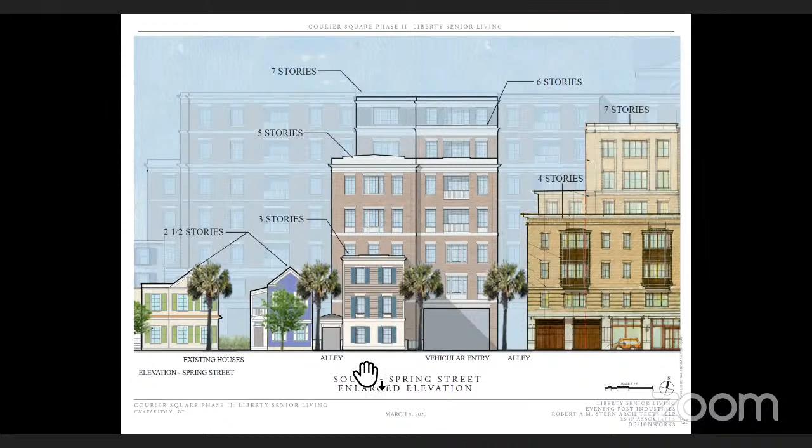So here you can see the proposed scheme up close. What has changed significantly is the lowering of the height of the building on Spring Street, so that the ground level no longer has the same floor-to-floor height as the rest of the project. This allows us to make it more in scale with the adjacent houses to the west.

The building behind it has been rendered in all brick and is now at 5 stories, and its wing to the right has been pushed farther back. Moving up the building, the 6-story portion has been pushed to the east, so you will see in the rendering that it's not all that visible, and then the upper level, the 7th floor above it. Next, please.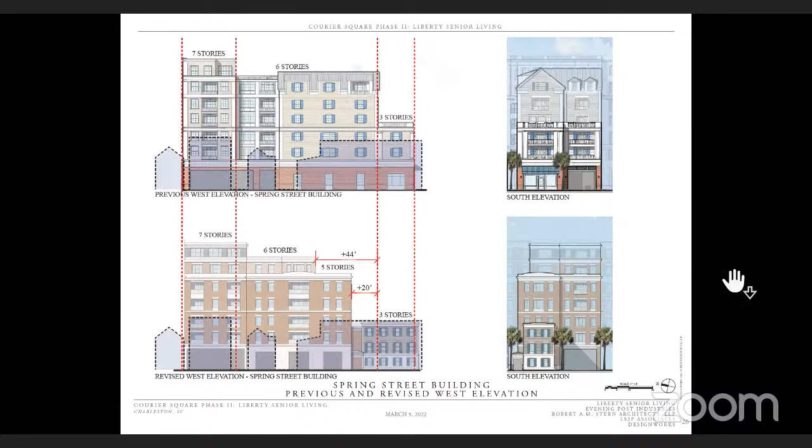And here you can see the overall dimensions of the new mass and the new scheme. The idea is to have the building on Spring Street rendered perhaps in clapboard, with the taller building behind it being in brick and more in keeping with the rest of the project. You can see the 3, the 5, the 6 stories and the 7 stories that have been changed to lessen its height, scale, and mass and impact from the west. Next.

Before view, next. And then the earlier proposal on the left and the right, which has been lowered in height and pushed farther back from Spring Street and is being rendered in a mostly brick palette. Next, please.

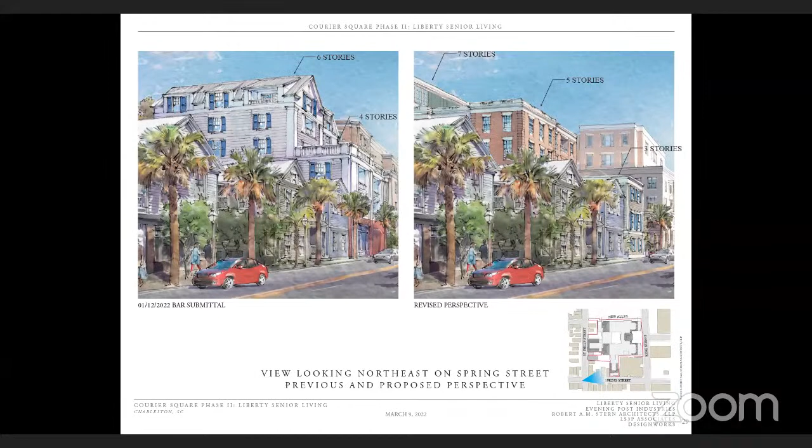And here you can see the various setbacks showing how far back the new design has been pushed from Spring Street. Next, please. And then a close-up. Next, please.

So this is a view looking northeast. In the proposed view, we feel the new approach helps mediate the scale of Hoffler Place with the buildings of the urban core and the scale of the neighborhood buildings to the west. The mass of the larger wing is pulled back 44 feet and virtually not visible from the street unless you're looking straight on. Next, please.

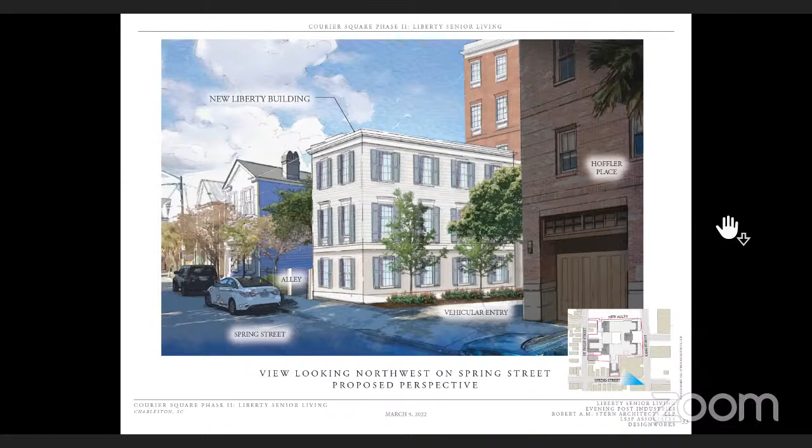So let's move to St. Philip Street. Next, please.

So the new design takes clues from the commercial structures on St. Philip Street, most notably the bank building to the north, just to the left of the little purple building there. We use those clues to really address the healthcare building, which is the larger of the two buildings that are going to preside on St. Philip Street. The floor-to-floor heights in the healthcare building align with the large building behind.

So on the first floor of the building will be administrative offices. We felt that using the commercial language of St. Philip Street was an appropriate strategy to help bring the scale of that first floor into the scale of the neighborhood. So you see those storefronts there and awnings, and Gary will provide more detail about that. Next, please.

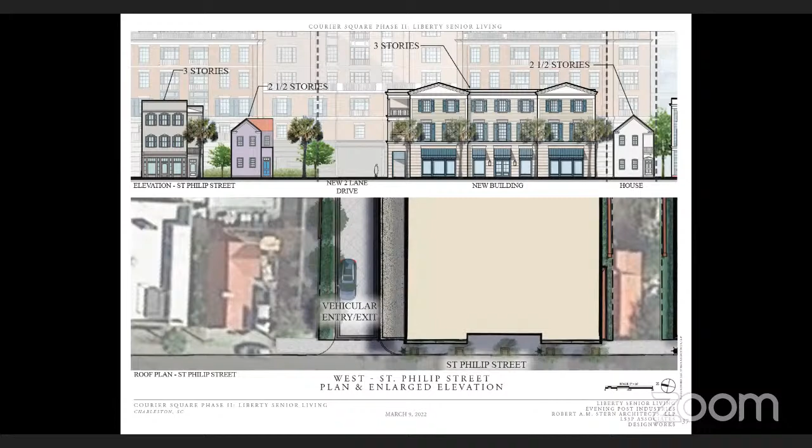And then just detail the two pavilions at the north and the south to break down the scale, with the porch facing north. The second floor windows, although larger than some of the adjacent houses, are slightly larger than what's on the bank building. This is a function of this building having a larger floor-to-floor height. Next, please.

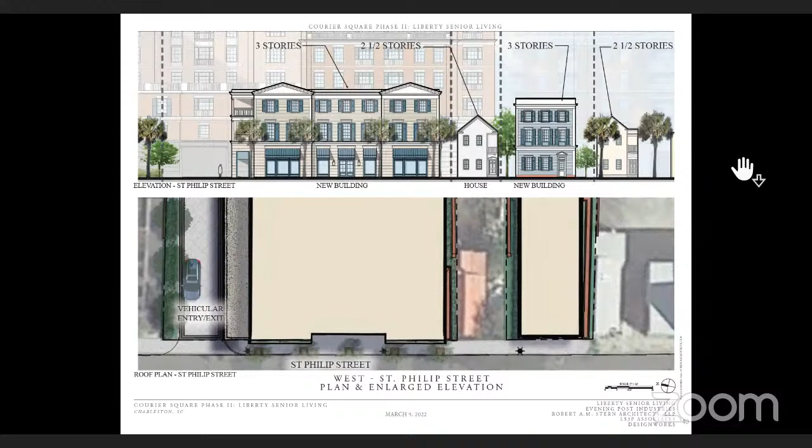Moving to the freestanding building, which is rendered in clapboard and in blue. It has a lower scale that is compatible to the adjacent houses, and has simplified detailing and windows appropriate to the scale of the adjacent context.

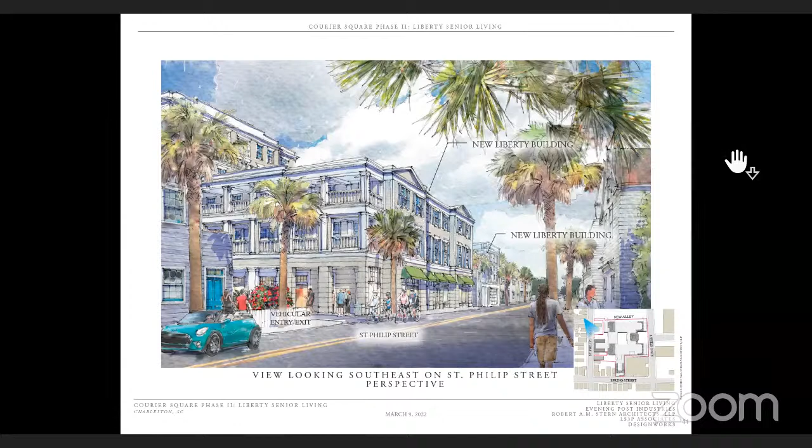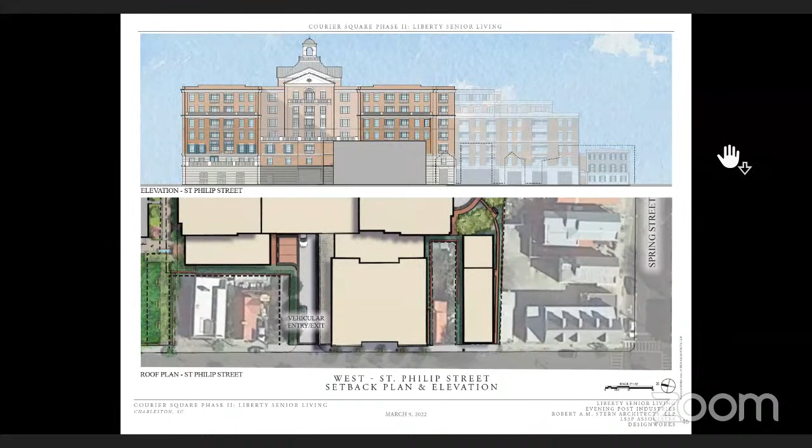This shows where the setbacks are and how far back. The wings are 100 feet back from St. Philip, with the tower component being about 237.

Scott, do you want to talk about the alley? The north elevation presides over the new alley. The ground floor has windows that open to the proposed restaurant and cafe in the new building, closer to King Street, and as you move further back, the openings respond to back of house. The alley will be heavily landscaped with trees and palms, so really it's the first 2 or 3 floors that will be mostly experienced by folks moving through there, and that's where the primary detail has been applied.

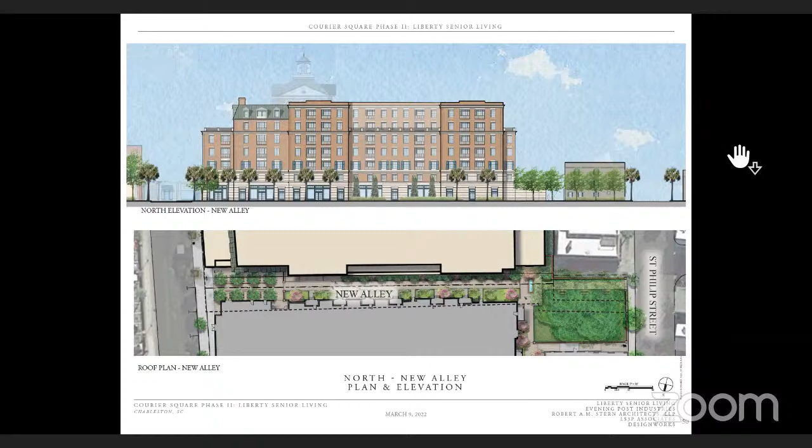And to our presenters, we're at the 22-minute mark. Do you think you need another 8 minutes to finish up? No, I think we need 1 more minute at most. Sure, of course, go to the next please.

Actually, the next slide is our last slide. So in conclusion, we feel that we've responded to the board and staff comments, and in so doing we've designed buildings that respect their context and hopefully will provide an outstanding addition to our city. The main building is unified, quiet, refined, and peaceful. The design is sympathetic to the historic remnant, and the new directions for Spring and St. Philip Streets are appropriate to their context. All of this has been achieved by significant reductions in the overall building mass. We are very pleased with the progress we've made, and we respectfully request conceptual approval. Thank you for your consideration and for the additional time.

Thank you for that very comprehensive presentation. That was a lot to cover and you did it well and efficiently, to my mind. I, for one, was impressed.

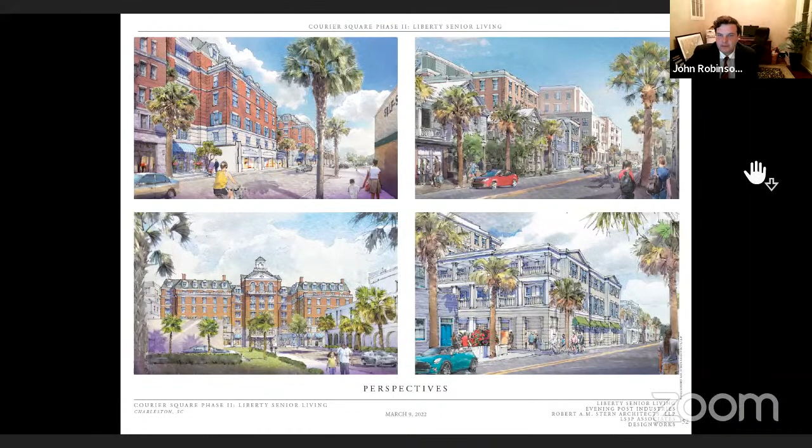That is not correct. I'm sure Lawrence will move us. There we go. Okay, there we go.

Oh, that's better. Okay. Number one, regarding King Street, improvements include the alignment of the courtyard and cupola, relocation of the balconies, revision to respond to the street angle, simplification of the dormers, and employment of a single unified language and material palette. Staff suggests that the 6th and 7th floors might benefit by responding to the angles of the center portion instead of the street.

Number two, the projected portions of the 2nd through 5th floors towards King Street are not equal in depth in order for the south portion to accommodate the Remnant building. These projections are equal in width and symmetrical in positioning around the motor court, and they should be made to match each other. Number three, shutters should be placed consistently or applicant should address the proposed placement.

4, at Spring Street, the proposed 3-story building close to the street fits in much better with the existing streetscape. Additionally, the architectural direction is improved with the flat roof and the omission of dormers and recessed balconies. The vehicular opening is large, however, it is set back.

I'm sorry, that was meant to be: the vehicular opening is large, however, it is set back from the street, fully behind the smaller building, and in reality, light will filter through the opening from the other side, mitigating any concerns of it being cavernous. Provide appropriate landscaping and hardscaping to dress up the vehicular entry. And last, number 5, at St.